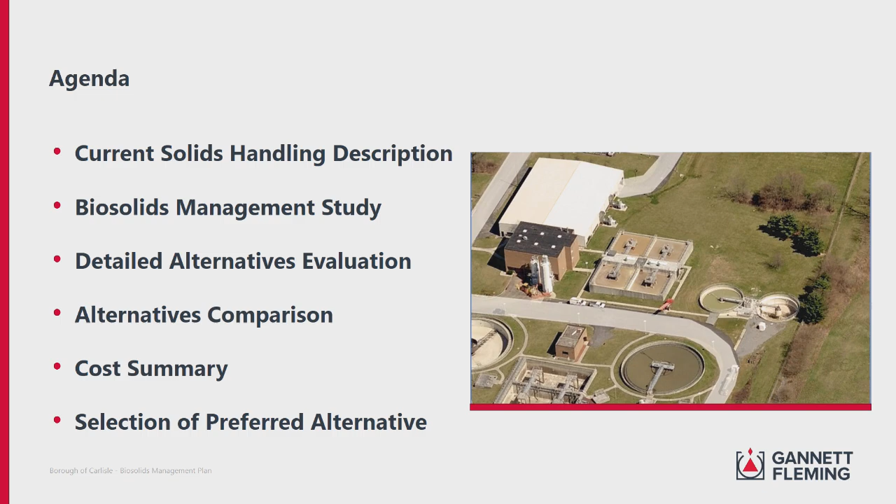Current biosolids handling process. We'll get into this study that I just showed you all. We'll talk about our detailed alternatives evaluations. We looked at 4 different potential processes. And then I'll get into comparing those alternatives, followed by a cost summary, and then our selection of our preferred alternative. Okay. So first, our current biosolids plan at the Carlisle wastewater treatment plant.

As you are probably well aware, the current process at the wastewater treatment plant is a liquid lime slurry stabilization. That's been utilized for coming up on 40 years now, and it has been a low-cost program, but it does rely on outdated equipment at this point, and the end product is marginal at best. And that final bullet there, number 3, it does require over 7 million gallons of that Class B liquid biosolids to be hauled annually. So that's 1,200 tanker loads.

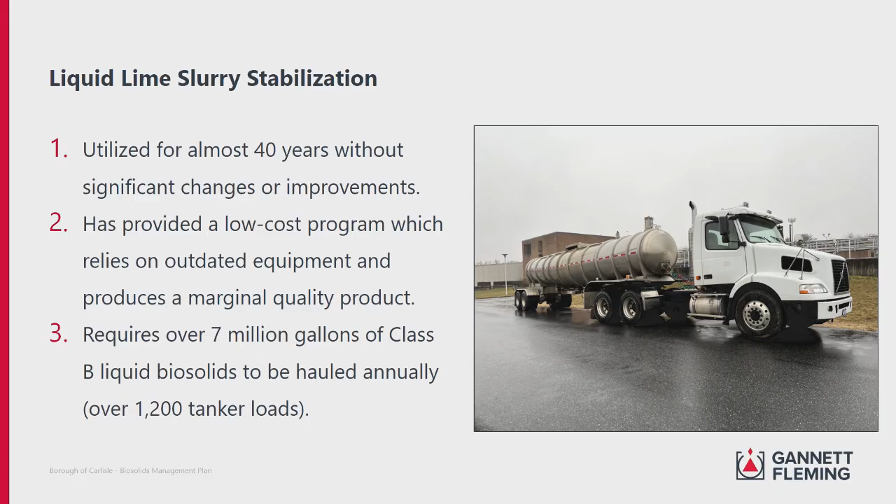Okay, so this is a schematic of that current process. Sludge is sent from the clarifiers to the gravity thickeners. I don't know if folks can see that or not, but there are some highlights as to issues that are experienced at the plant. There's one there at the gravity thickeners and the sludge holding tanks, which are nuisance odors. At the sludge holding tanks, there's a lime slurry addition, and there are maintenance challenges there.

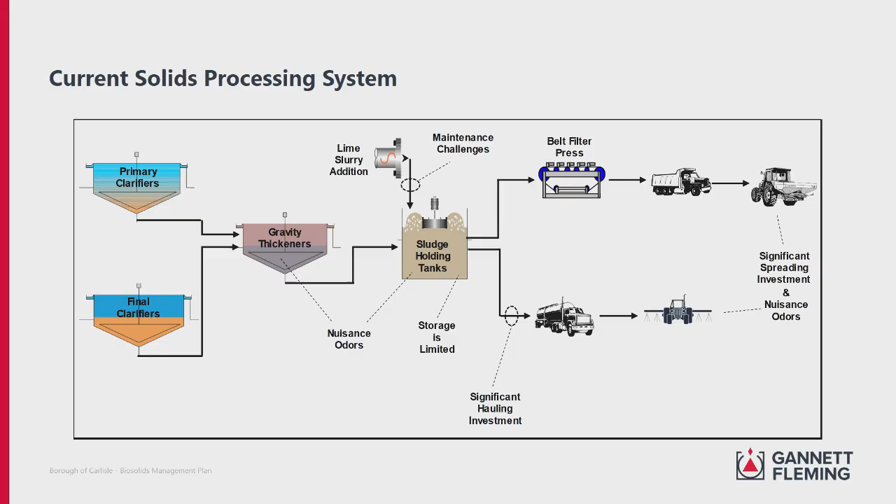And then finally, from those sludge holding tanks, that liquid stabilized sludge is either hauled, or when it can't be land applied, it is sent through the belt filter press at the plant. And again, there's nuisance odors there at the final discharge locations.

Okay, so this slide here basically details what I hit on already. It's been a reliable process, but it does present some operational difficulties. The largest of which are those nuisance odors and some complaints from the neighbors, as well as premature equipment failure and clogging problems. Like I mentioned, there have been some complaints received from those nuisance odors, and there has been a negative public perception of that process.

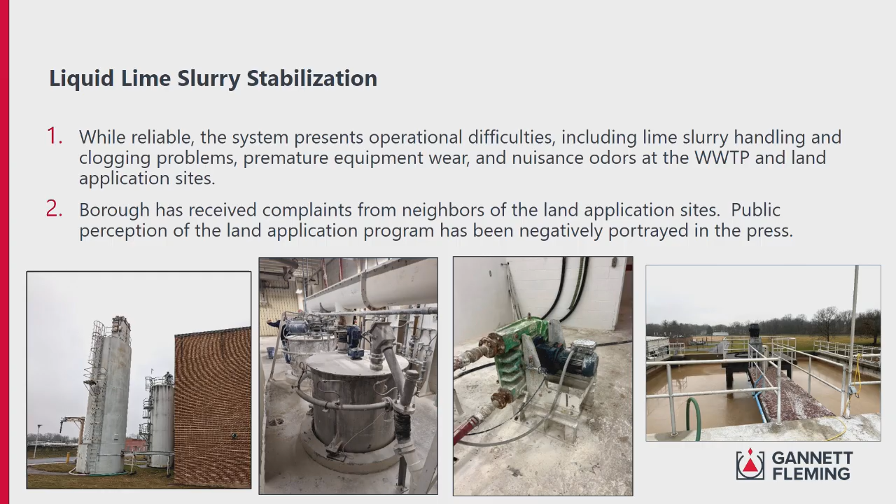Okay, so next I'd like to talk about this study that we have undertaken. The main goal for the study was to develop a plan that is affordable and cost effective. We wanted to make sure it's energy efficient as well as environmentally sound, and that will last you guys 25 years, hopefully much more than that.

What goes into an effective biosolids program? That it'll provide you a direction for the future. We'll consider diversifying the outlets and end use options that you would have for your biosolids, and we don't want to hide from any risks. We want to acknowledge those and understand them, and fully work to mitigate any risks associated with the new program.

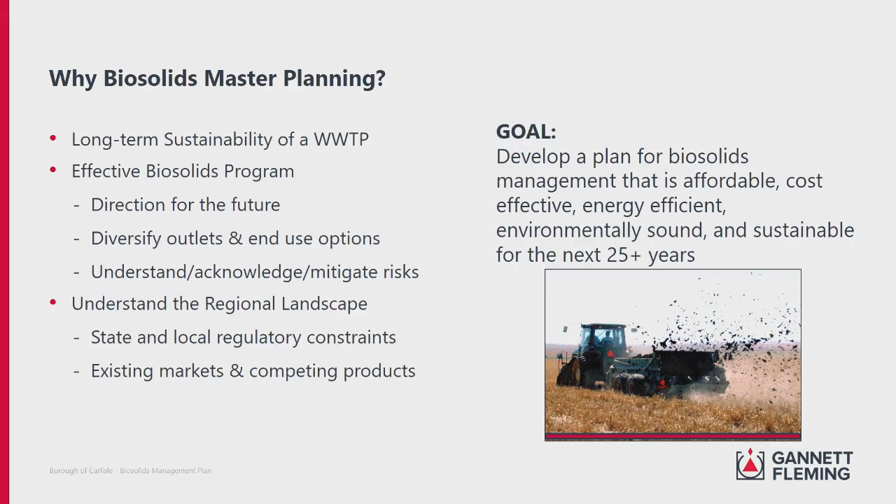As a part of our plan, we also looked at the regional landscape. So as part of our report, we did look at existing markets, as well as competing products, and then the local and state regulatory constraints. So this slide details our tasks, how we stepped through this process. I added some dates on the right side of the slide, and there were a series of tech memos, and those were all delivered in April of 2023.

That first task was to assess what's going on at the plant, what those existing conditions look like. In addition to that, we provided a technical memorandum detailing the regulatory landscape, and we provided an end-use market survey. And finally, we talked with you folks and developed our non-economic decision criteria to rank these various alternatives. And from there, we developed our preliminary alternatives. I believe this was a significantly long list of alternatives. And from there, we boiled it down to 4.

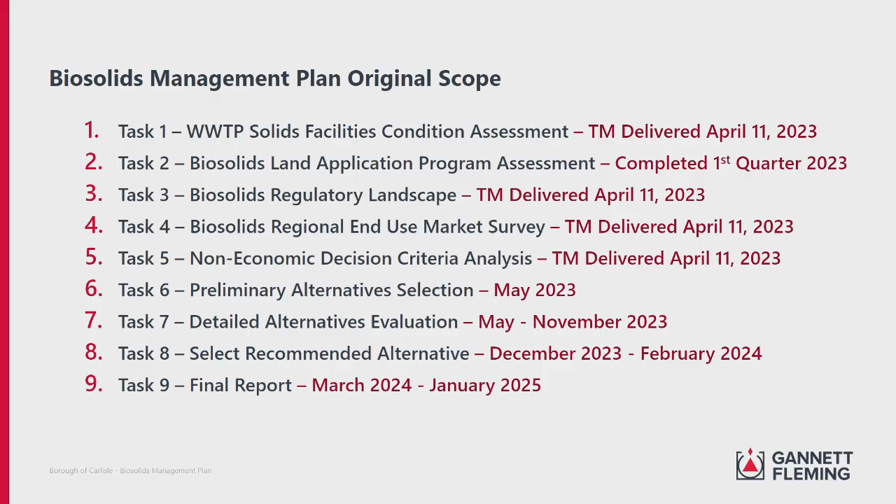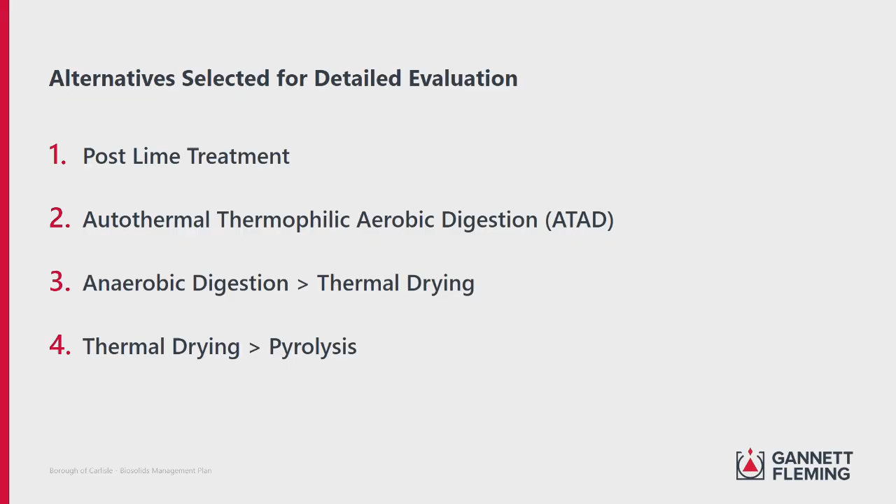Those 4 alternatives were investigated thoroughly, as folks that reviewed this report could attest to. And over the past year, we've developed this final report that summarizes all of our work. Okay, so I wanted to hop into the 4 different alternatives that we looked at for this biosolids study. And this is a table directly from the report. The first alternative there is the post-lime treatment. That is what is currently existing at the wastewater treatment plant.

Second alternative is autothermal thermophilic aerobic digestion. I'm going to try not to say that again in this presentation. I'll leave it to ATAD. The third process is anaerobic digestion plus thermal drying. And the final alternative that we did look at was thermal drying with pyrolysis.

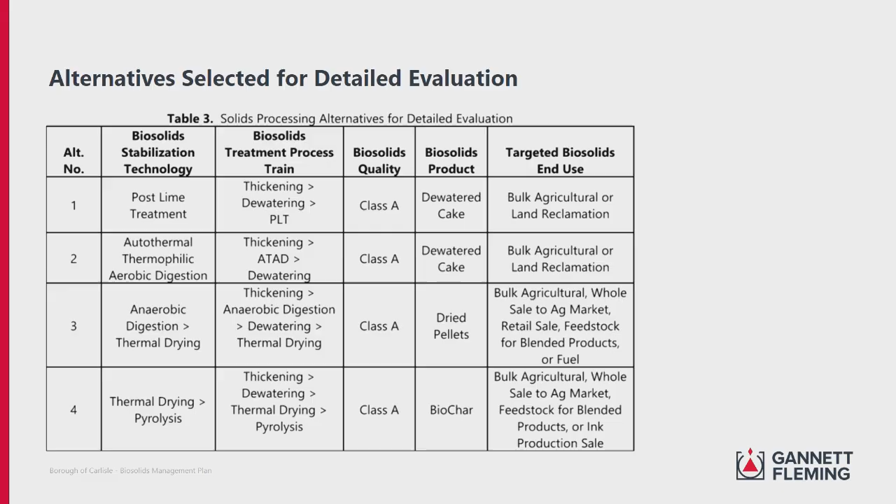Okay, so the first alternative that we looked at, like I mentioned, is the post-lime treatment. And this is a schematic. This is courtesy of Charter Machine Company, a belt filter press manufacturer. This pretty much summarizes the approach for that post-lime treatment process.

By the way, if there are any questions, we can discuss those at the end, but if something pops to mind, just try to get my attention and we can discuss that at this point.

The post-lime treatment opportunities and challenges, or pros and cons, that I want to highlight. This treatment process does have a lower capital cost. It's a simpler operation. It reuses existing infrastructure. You folks know how this works. It's similar technology to what is currently going on at the wastewater treatment plant, and it's proven.

However, there are a few cons with this alternative. Nuisance odors. I think I've mentioned that a few times already in the presentation. There is a significant volume of biosolids that is created from this process. I touched on the high hauling and disposal costs associated with it. Quicklime handling is super messy, and pathogen regrowth. There is potential for those pathogens to regrow with this process. And then there is a limited use for the final product, or the final cake.

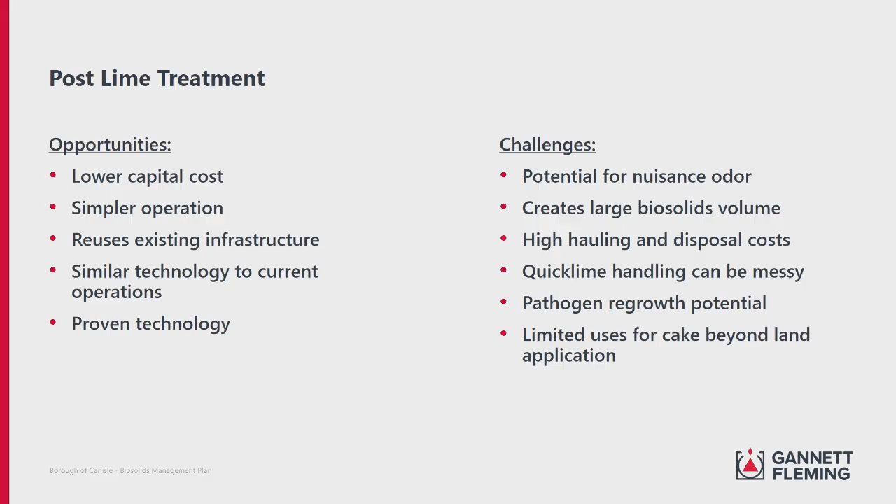The next process that I wanted to talk about quickly is the ATAD process. This is a schematic from ThermAer. This is the process that we pulled from their site. I don't want to get into the technical details, but I did want to point out that there are a few local installations of this process here in Central PA. Lower Allen and Middletown wastewater treatment plants utilize this process.

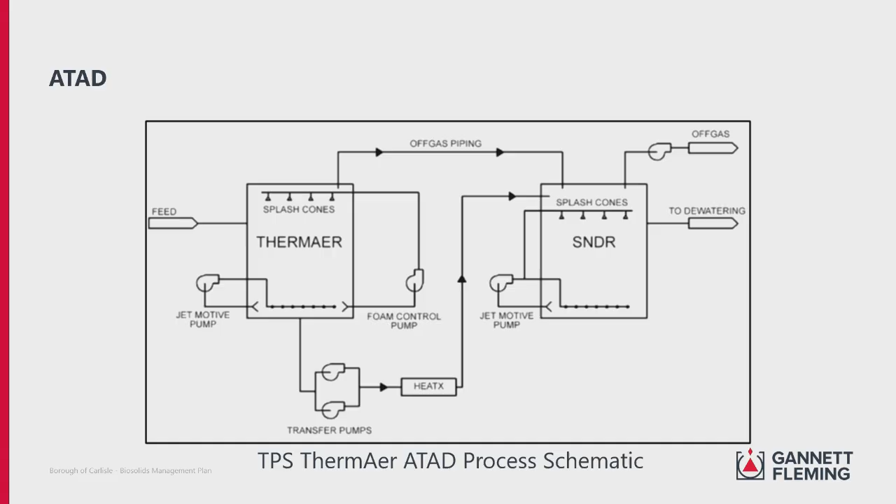So from a pro, con, or opportunity challenge perspective, this process does provide a much more significant reduction in solids. We state here that's greater than 50% reduction than what you currently have. It also reuses existing infrastructure, so that's a positive there, and it is proven. A challenge, there is a moderately high cost associated with this. At the end of the presentation, I get into the details of our cost estimates.

It's super energy intensive, so there's high electrical costs associated with it. Foam control is needed, and odor control is necessary to prevent those nuisance odors. And the dewatering for this process can be challenging. It is slightly more complex than that first alternative that I spoke to. And finally, there's a limited use for cake, that final product, beyond land application.

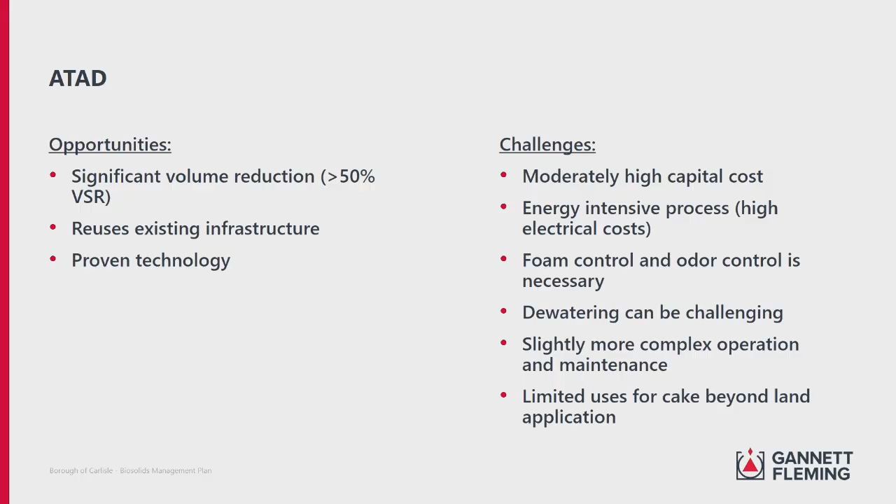The next option that I wanted to speak to is anaerobic digestion and thermal drying. On the right side of this slide here is another process diagram for this alternative.

Again, don't want to get into the details unless you folks want to get into the technical details of this process. However, I've personally seen a lot of anaerobic digestion, and from a location perspective, we did have a few site visits to investigate this alternative. Hanover Wastewater Treatment Plant utilizes this process. There was a site visit taken to that plant back in August of 2023. Same with Lancaster Area Sewer Authority. They use a similar process, and again, a site visit was taken to see that process there at that wastewater treatment plant.

I'm going to list a few other ones: City of Hagerstown, Maryland, Borough of Chambersburg, City of Lebanon Authority, Derry Township Municipal Authority, East Penn Borough, Borough of Lewistown. I'll stop there. You guys kind of get the gist.

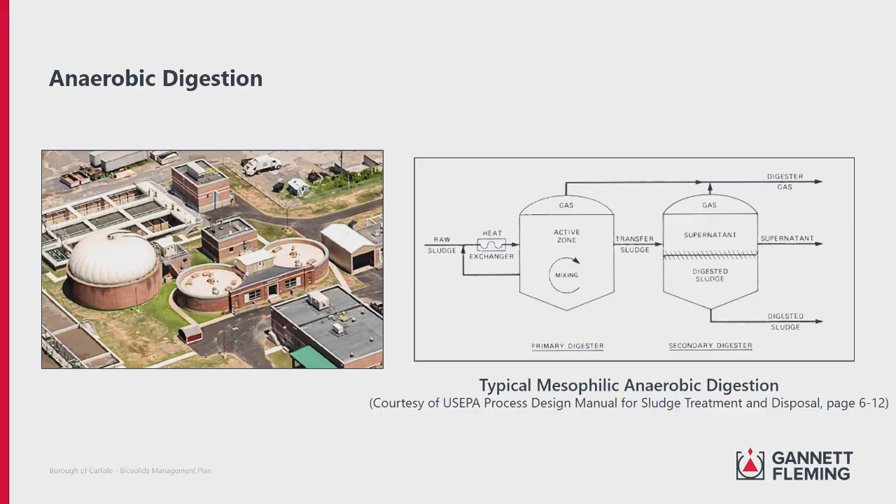In addition, I mentioned that this is anaerobic digestion plus thermal drying. So this process would include that thermal drying, which is basically a heat drying of that dewatered biosolids. This does reduce that end product by 90% compared to that dewatered cake volume that comes out. There are two types of dryers, a direct and indirect. And there are many different types of dryer technologies out there, and they provide a wide range of end products. For this process, it is recommended that a direct drum dryer is utilized.

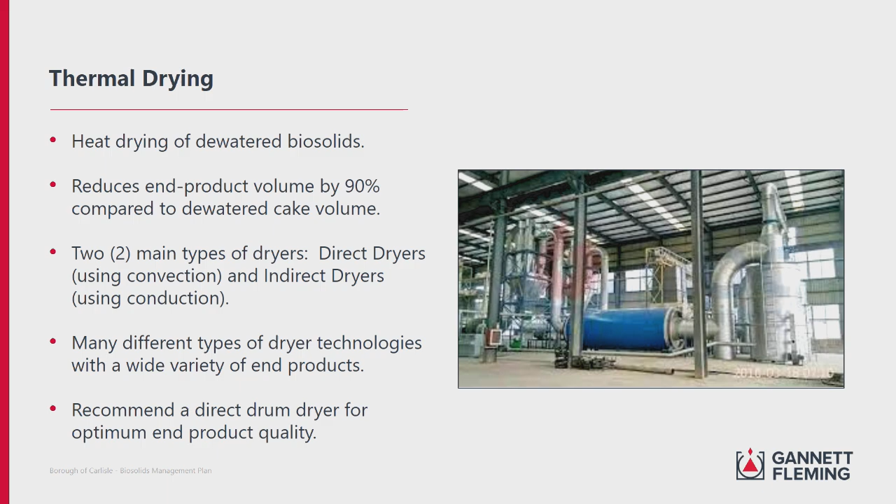Opportunities and challenges. So, an opportunity for anaerobic digestion and thermal drying, there is an energy recovery potential to utilize that biogas from this process. Again, there's a similar volume reduction. There is odor reduction and mitigation associated with this process. It's anaerobic. It's all covered. Those tanks are covered. Both Class A biosolids and Class B biosolids can be produced. I'll get into that a bit more further on in the presentation. Like I said, it's a proven technology, and there are construction phasing opportunities with this process.

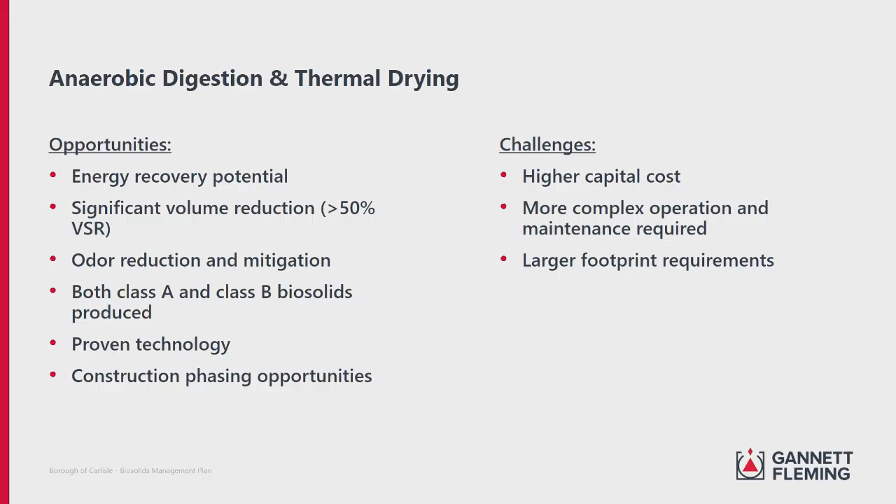From a challenge perspective, there is a higher capital cost associated with this process. It's a bit more complex to operate and maintain, and there are larger footprint requirements. So new tankage would be required for this process.

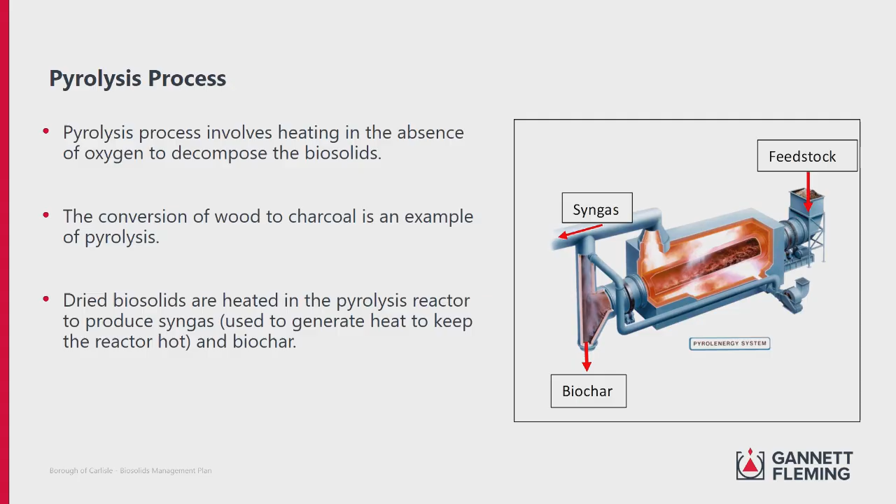So the pyrolysis process, it does reduce the end product by 90% compared to that incoming dewatered cake volume. That final point, I guess I could touch on that quickly. There is no digestion associated with this option, so there's no tankage, similar to the ATAD. You have digester tanks with the anaerobic. Third alternative, you have tankage. This does not include that tankage. This does not require that. There is a market for the biochar, which is the product that is produced, so that is able to be sold.

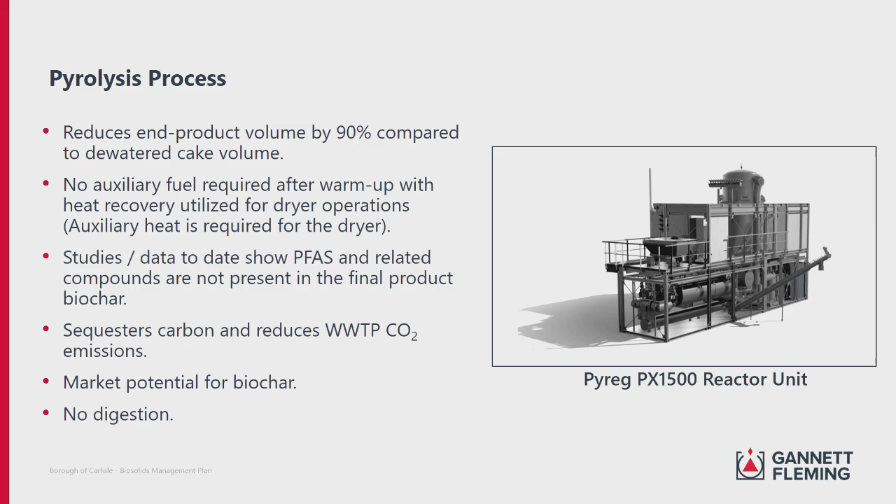That third bullet there, there's studies and data to date that do show that PFAS and related compounds aren't present in the final product of biochar, but like I said, that is still evolving and changing. We had a conversation. It seems to be changing week to week with new studies coming out.

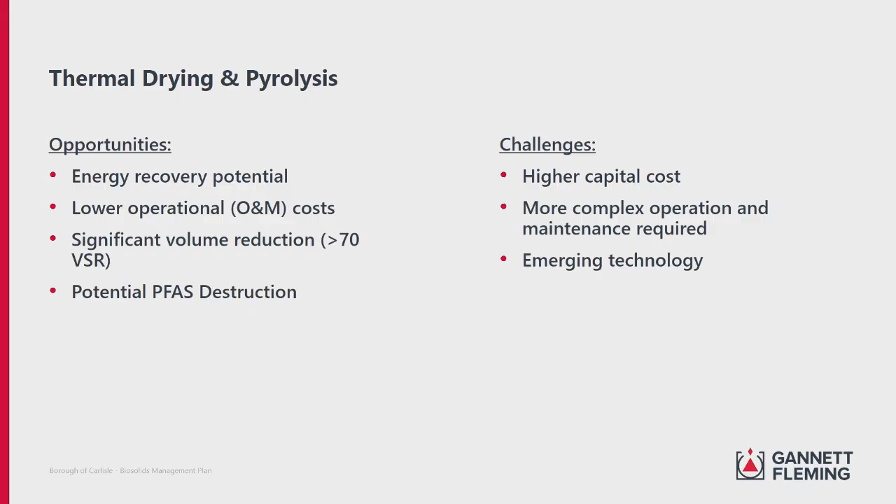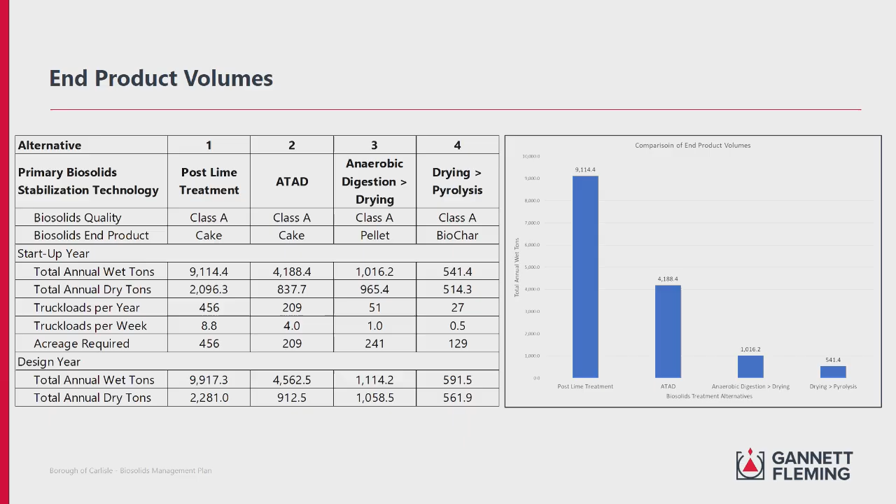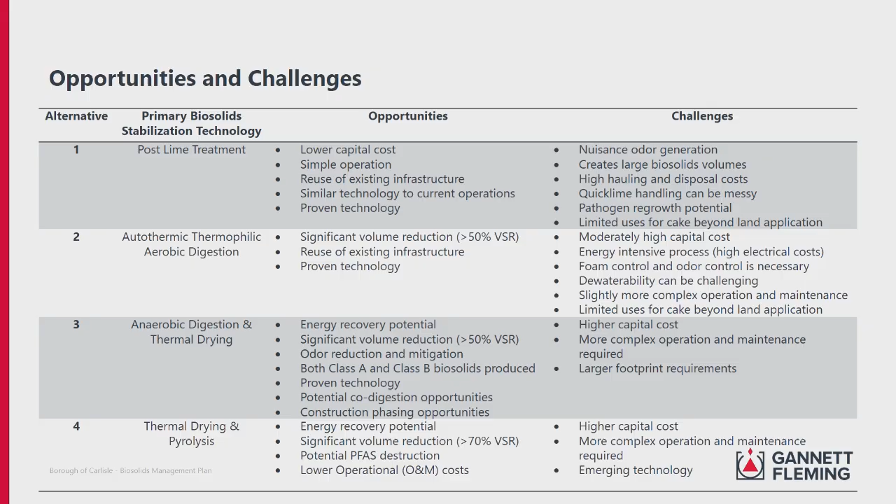This slide should look familiar. This pretty much takes all of those pros and cons that I spoke about already and summarizes them in one slide. So I'm not going to get into each of these bullet points. Whenever I was looking at this in preparation, I did highlight a few that, I might be getting ahead of myself, but are almost non-starters or fatal flaws with some of these options. Nuisance odors for option 1 with the post-lime treatment, and then for the pyrolysis, the fact that it's an emerging technology is another kind of non-starter for alternative 4.

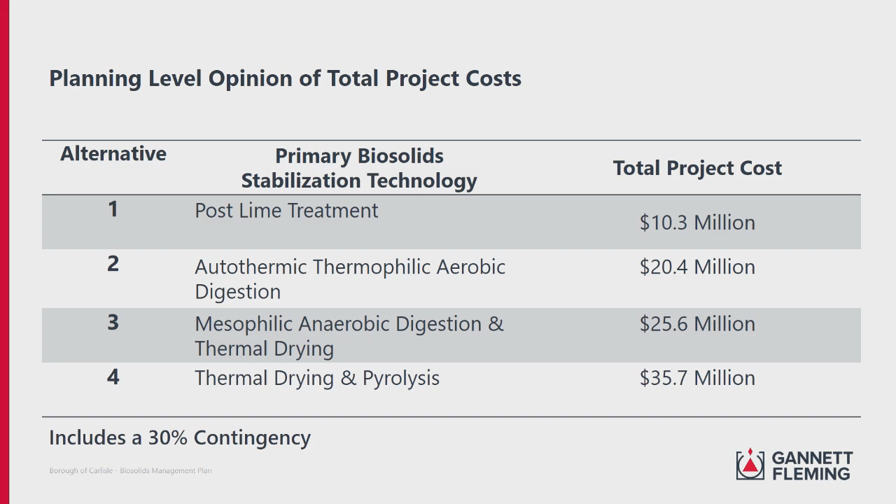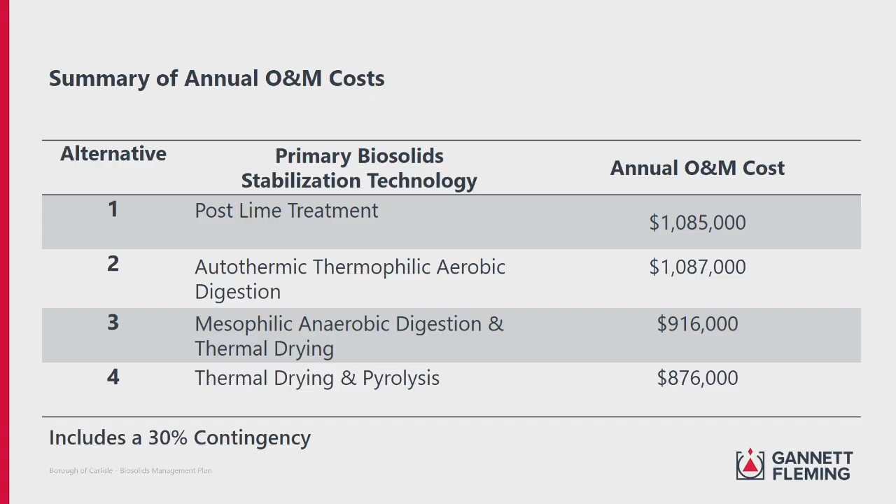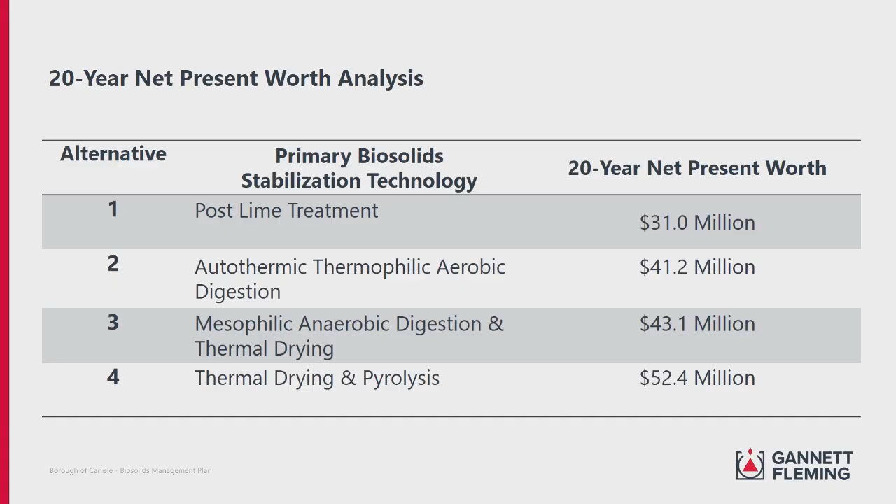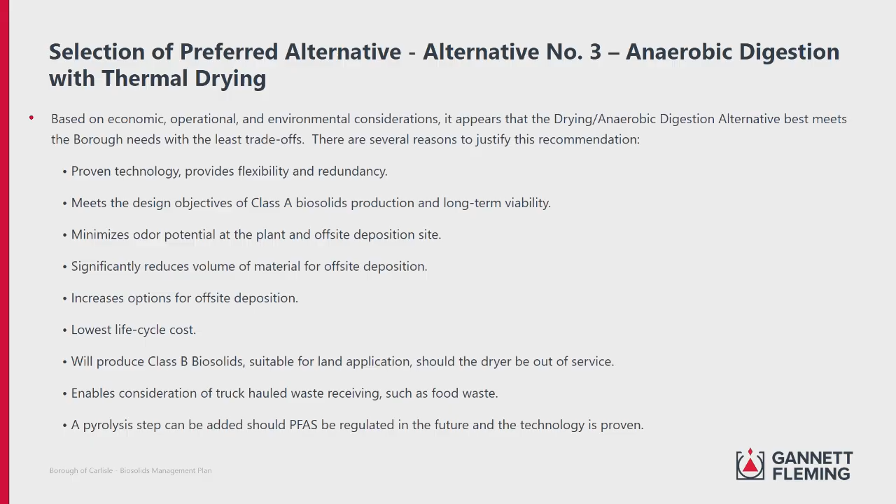And finally, that final bullet I want to speak to, pyrolysis can be added in the future should PFAS be regulated and that technology becomes proven. The best way I could phrase it is you don't want to be the first person to try out the new technology. You kind of want to let others be that guinea pig. And with that, that's the end of the presentation. I hopefully kept it to 15 minutes, but I'll open up to any questions.

Yeah, I have one. So in option 1, one of the challenges you had was that a larger footprint was required. Yes. So we have space available for that? We do. We have space available. I'm envisioning the site plan in my mind. Is that to the south? To the south of the existing sludge holding tanks and to the west. Okay. There's space available in the existing site, and it's grouped with the other solids handling processes.

And then should the pyrolysis technology eventually become available, would there be a space issue for incorporating that? In this report we did provide layouts, and we provided a footprint, an area for that to be added in the future. For alternative 3 we wouldn't do the design for the pyrolysis, but we'd make sure that we considered connections and footprint availability and things like that. Any other questions?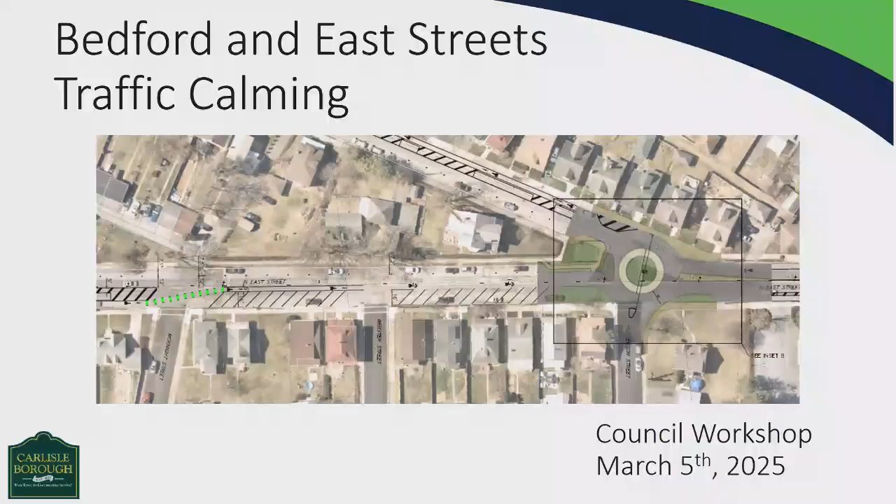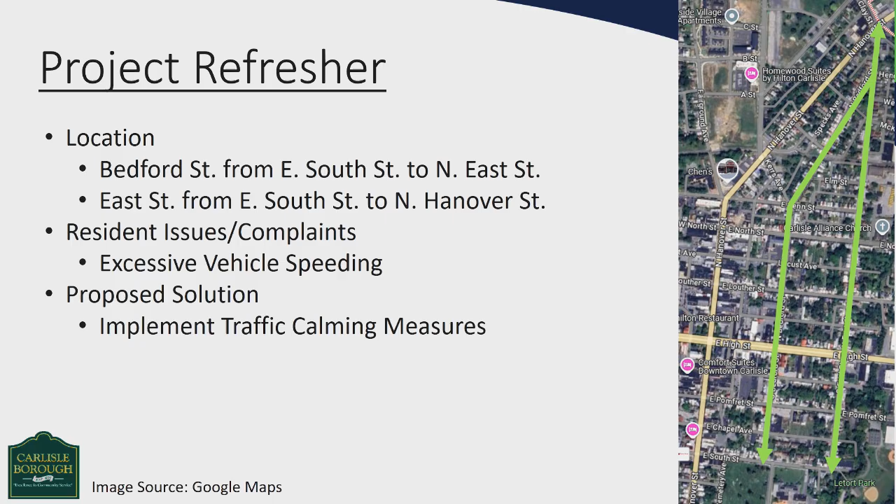It's mostly an update on the Bedford and East traffic calming project. Before we dive in, let's remind ourselves what it entails. We received several complaints about speeding, and it makes sense. You've got two one-way corridors, both with 2 lanes. People tend to travel at the speed they feel comfortable, so on a wide open roadway with no oncoming traffic, it's easy to pick up speed even unintentionally. So we worked with Dawood Engineering to develop a menu of traffic calming options.

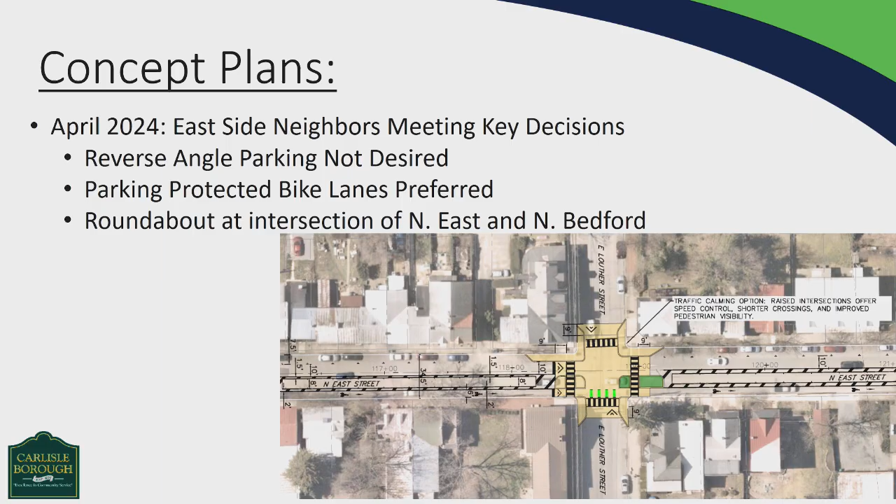They produced a set of concept plans, which we shared about a year ago at the Eastside Neighbors meeting. In addition to the menu, we looked at reverse angle parking, parking protected bike lanes, and a mini roundabout at East and Bedford. The feedback was that reverse angle parking had a lot of concerns about operations, plus it takes up additional right-of-way. It does produce more spaces in theory, but if the parking areas are disjointed, you don't gain that advantage. But we got positive feedback on the roundabout and especially the parking protected bike lanes.

So we looked at 3 different options for moving forward, different ways of investing different amounts with various outcomes. Option one is striping only: all improvements would be lines painted on the road, no physical barriers, which is pretty easy to implement. Option two is what we call a quick build, using flexible delineators and quick curb, physical items bolted into the pavement but temporary, meaning they can be removed. Option three is a permanent solution using actual concrete and macadam.

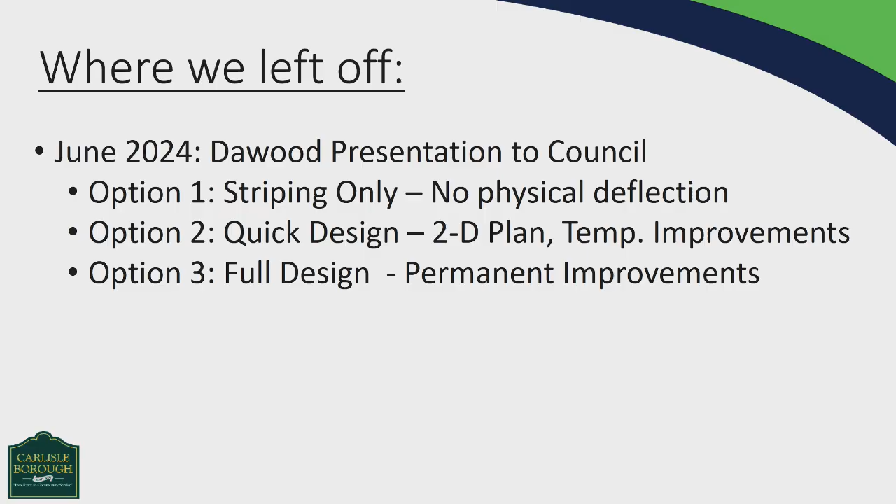Option one with striping only is the cheapest. A major advantage is it's more of a true pilot; we can try different things without much cost and see what works. The other advantage is we were part of a multi-municipal Safe Streets for All grant application, which we received. Lower Paxton Township is spearheading that grant, and I give credit to Jared for the concept of putting in these quick build improvements so we can try different things without investing too heavily. The major con is that with no physical separation, we may not get the desired results as effectively, because people could just drive over the line.

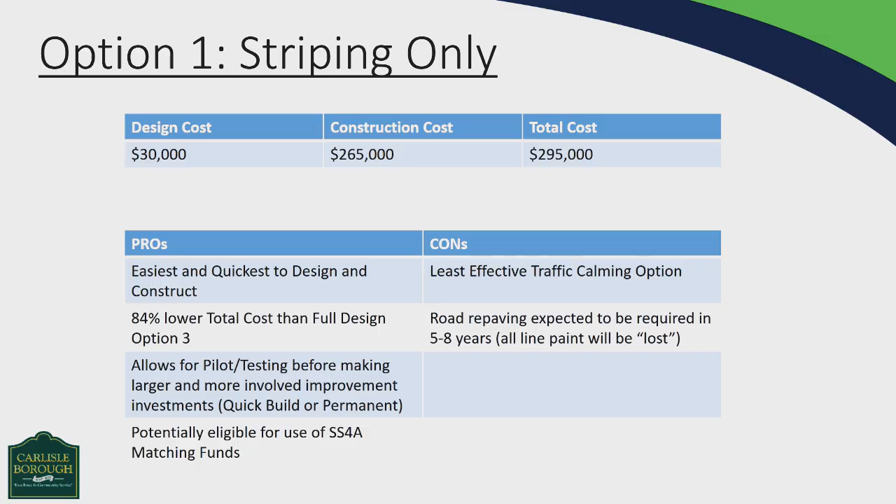Then for option two, it is more costly for sure, both in terms of design and even more so for construction. But with these quick builds, it still is kind of a pilot. It just gives you a little more protection with these physical pieces that are put into the road.

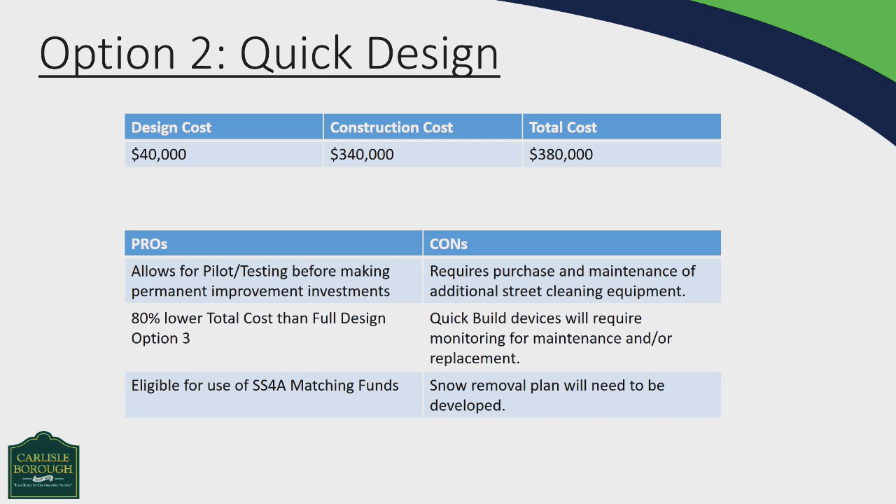But now when we put something physical into the road, there are some operational challenges that we have to overcome. We'd have to think about street sweeping. We'd have to think about snow removal. Probably even need to buy additional pieces of equipment, not to mention figure out the staffing and how that would work to achieve those maintenance issues.

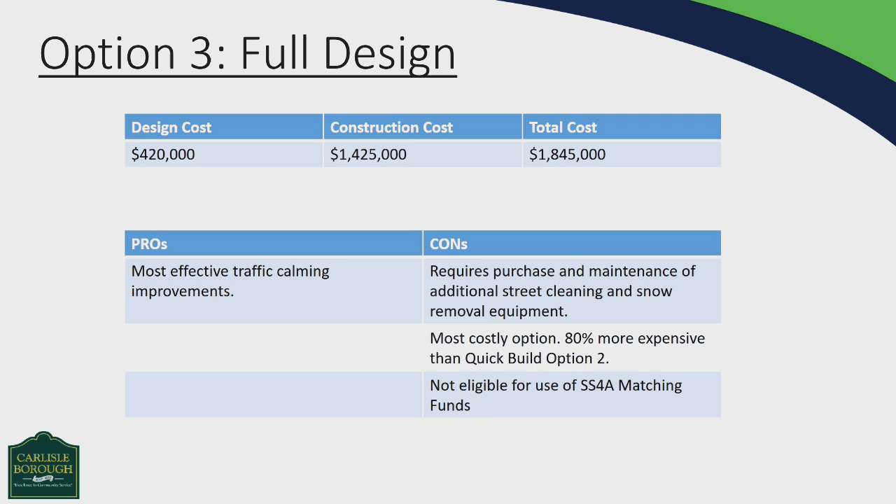And then option three, the full design, it's obviously the most effective. It's the quote best. But with the other two, you have that ability to evaluate it before you invest that money. I guess the other disadvantage of the full design right now, given that we have the SS4A grant, those funds would not be able to be used for this purpose because the SS4A funds are for either a quick build or a striping only.

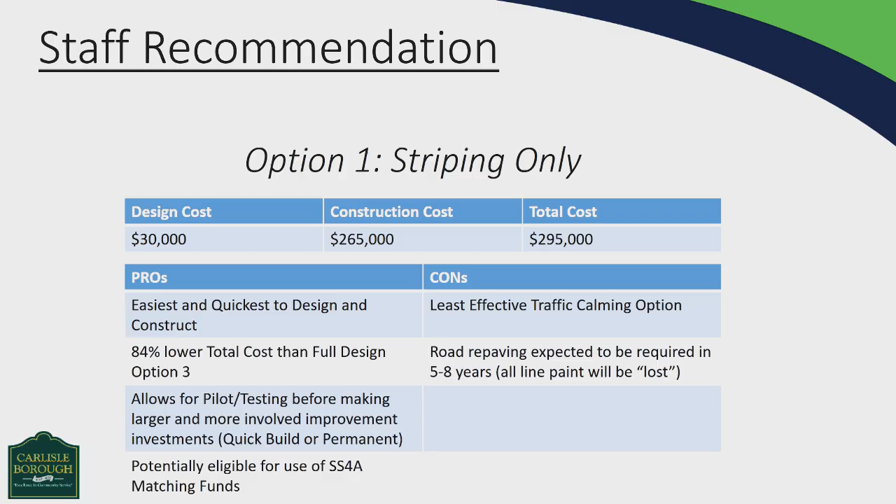So, with that, it's our recommendation that we move forward with option one. It's the lowest level of financial commitment and allows us to see what works and what doesn't before investing in a more permanent solution. So we'll take that to you at a future council meeting and request action on one of the three options. And either way, for any of those three options, we would still work with Dalwood to produce that set of design plans that eventually could be put out to bid. And hopefully I didn't go too fast, but certainly open to questions.

Yeah, Jeff, is there an option maybe to do sort of a hybrid of one and two, where maybe at critical points, using those flexible plastic bollards, like at the chicane and that sort of thing, where you really need drivers to follow the lines? So then maybe we're somewhere in between those cost options.

Yeah, good question. If we went with the striping only, then we could probably even use Borough forces to bolt down some of those flexible delineators in certain spots. We'll still have to think through the operational issues in terms of street cleaning and snow removal. But yeah, there would be that too. And if we went with a striping only plus, they would be eligible for the SS4A funding as well. Right. Okay.

How much of either the quick build or the striping would be eligible for the matching funds you said? I'm just kind of curious as to how that would ultimately impact the cost to the borough for either of those options. Yeah, those are 80-20 grant funding. I have to remind myself of what those numbers are. Didn't have them memorized, but for the striping only, when it's all said and done, it'd be about 60,000 in terms of our match for the 300,000 total, roughly.